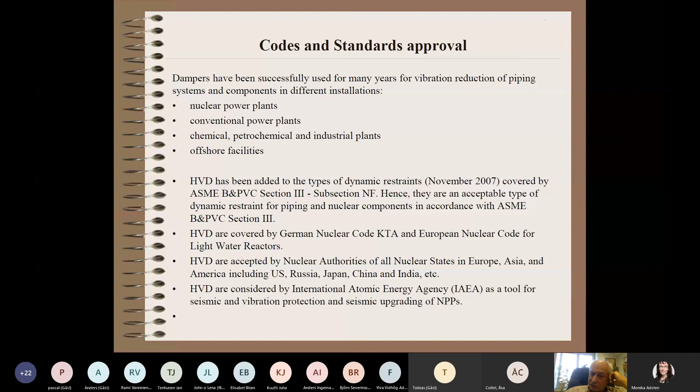For many years we have used this in nuclear power plants, conventional power plants, chemical, petrochemical and industrial plants, and offshore facilities. In November 2007, the viscodamper was added to the ASME code, and it also exists in KTA, the German nuclear code, and is recommended by IAEA for vibration mitigation and seismic resolve matters.

Regarding piping vibration criteria variety, it's a rather difficult question and problem compared with rotating machines. There is a lot of criteria, but the main ones are the Wachel norms and also VDI norms that we use in practice.

As you know, there is an ASME OMa recommendation with a threshold fatigue limit of 1/2 inch per second peak velocity. There are also some Russian standards, but I have to point out first that the criteria we developed for the Loviisa NPP on resolving vibration matters with upgrading its power was set at 7.5 RMS vibration velocity, and it's a really good limit to protect piping from fatigue.

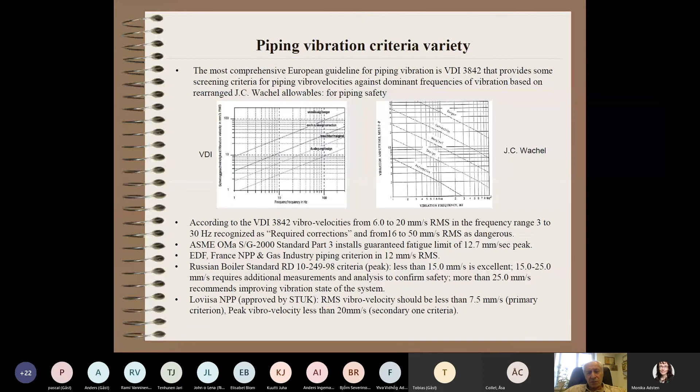Next slide please. Here are examples of damper supports. Some of them were presented in the previous presentation - thanks for the very good overview of different techniques.

Here are examples in the first row of damper applications in containment areas. The left picture shows the feed water line, and in the steam building also the feed water line and other lines, and the condenser part.

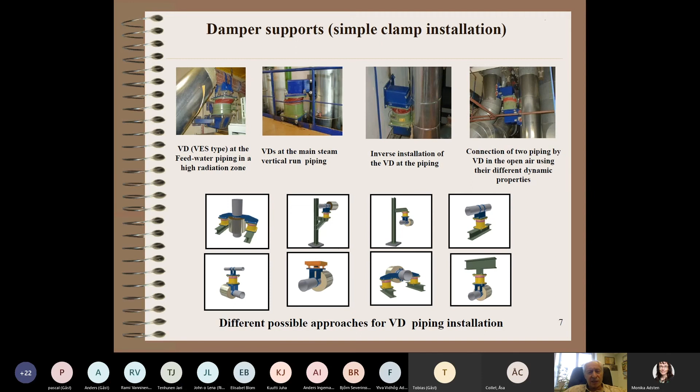Next slide, please. I will not pay too much attention.

Also, please note the left corner: early 80s tests from last century in the IHI shaking table with viscodampers, and finally the 2014 comprehensive test in the Japanese program for starting up nuclear power plants that were shut down. This special test was used also for seismic matters as well as operational vibration matters. So finally, as a result of this test, a mathematical analytical model of all types of dampers was developed, which presents a four-step Maxwell model.

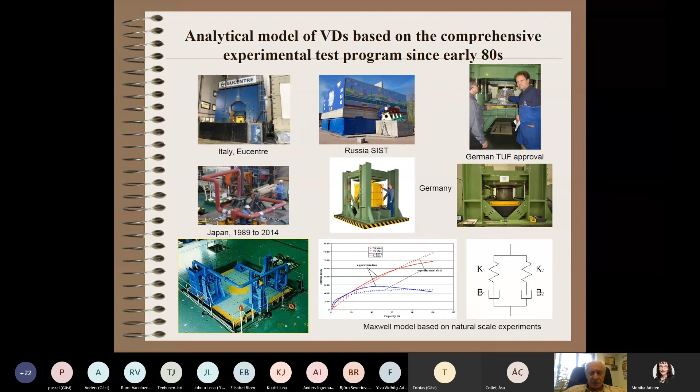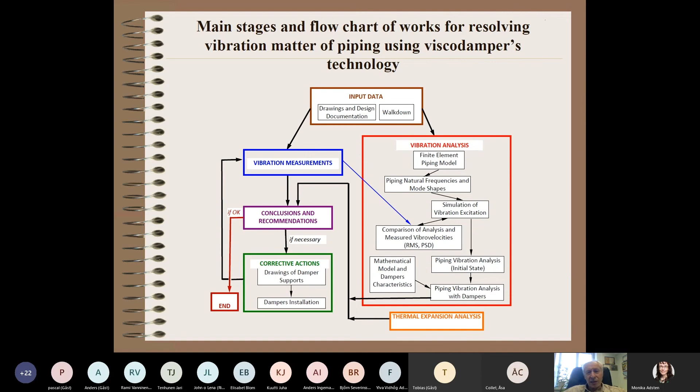Next slide, please. Here is the flow chart. So if you want to eliminate vibration, you have to follow this flow chart. Sometimes the use of viscodampers is not so successful as expected, but in the majority of cases this is because the flow chart was not followed. So it's very important - all blocks of the flow chart are very important to be successful in eliminating piping vibration. Next slide, please.

Here are some examples of application. There are numbers and numbers of examples in the report, but here are just a few, starting from 1988 at the most powerful steam turbine in Europe, 1200 megawatts, which suffered very high vibration on main steam lines with pressure of 24 MPa and temperature 565. This operational process suffered too much with this vibration and had no ability to maintain it. So it's the first example of installation of VD dampers, and we had a very extremely high effect on eliminating vibration.

One of the latest experiences is at Kola NPP, exactly the same as Loviisa PP. You can see the blue line is the vibration - blue column vibration was before dampers installation, and red after dampers installation. The result is obvious. Next slide, please.

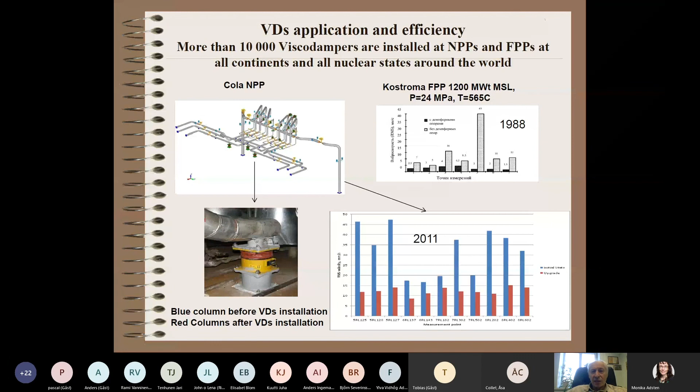For the VES dampers, bitumen-based medium, there is practically no influence from radiation. That means both types of dampers, VD and VES, can be installed in proximity of reactors. We have examples where, for almost 25 years, one set of dampers has been working in an extremely high radiation zone in RBMK reactors, Chernobyl-type reactors. Next slide, please.

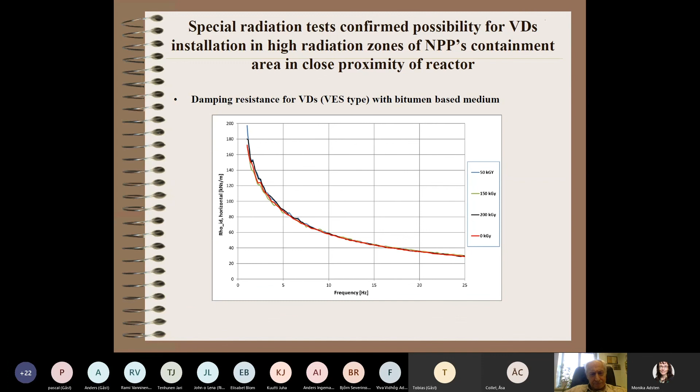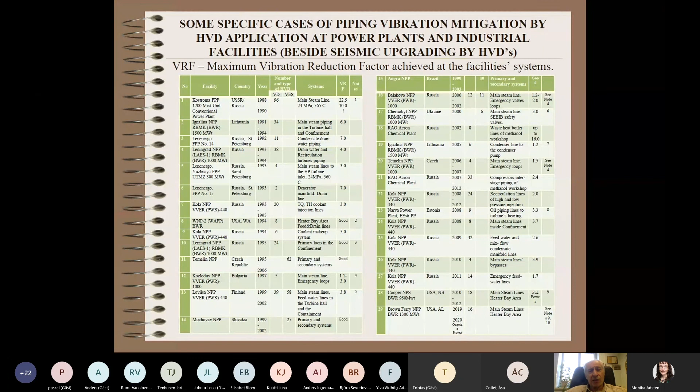Here are some specific cases of vibration mitigation. You can see a number of them in the report, with all description of these cases, and also explanation of why some cases are very successful and why some others are not so successful. All of them decrease vibration essentially, but if you follow the flow chart shown initially, you'll be completely on the way to success.

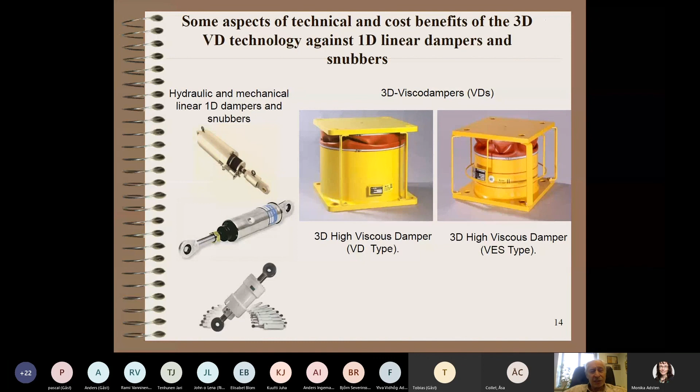Next slide, please. Here are some aspects of technical and cost benefits of 3D technology against 1D linear dampers. In the previous presentation there was some wording about that, but I want to emphasize this point. So if you compare two options, to use 1D linear damping or 3D viscodampers. Next slide, please.

Regarding required number and primary cost - in the left picture you can see the primary cost. For a 1200 megawatt nuclear power unit, if you need 750 snubber units, you need 3 times fewer dampers due to 3D operation. So even in primary cost, we have a factor of 3.

But it's not so important in comparison with the maintenance cost. According to our experience and according to the US NRC experience with the American snubber problem, you have dramatically lower maintenance cost in case of viscodampers, because snubbers are a rather complex mechanical system. That means after 3 to 5 years, you have to disassemble it, wash it, bring it to a clear area, test it, and then bring it back. It's a lot of cost, a lot of money. So that means high viscous dampers do not need that - you install it forever. In some cases you can change the liquid, probably after 20-25 years of operation. You can change the liquid during outages, nothing more.

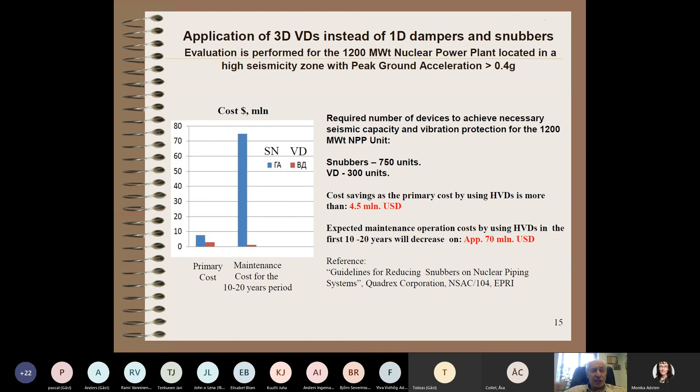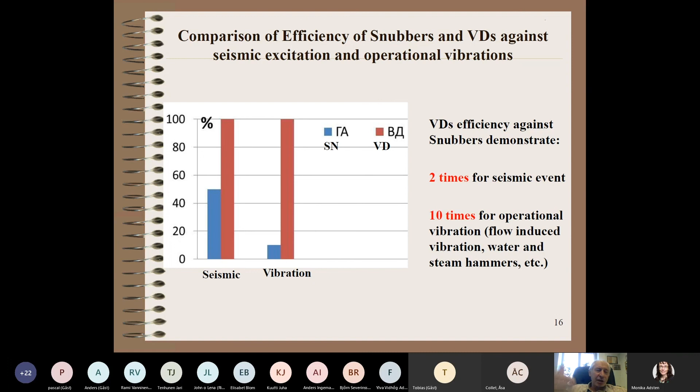Next slide, please. Regarding efficiency: for seismic, it's approximately twice better, and for vibration mitigation, it's 10 times better. Our examples and a number of cases confirm it. Next slide, please.

Here is a very practical example of a new line where a comparative study was done on whether to install snubbers or dampers on the system. Initially 8 Lisega snubbers were installed - this JNG NPP line is a PWR reactor - and then it was substituted by only 3 dampers. That's only primary cost, and as mentioned, much more expense is devoted to maintenance costs.

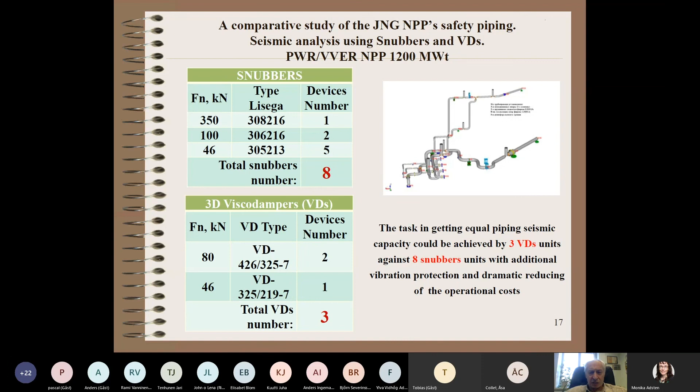Next slide, please. And final remarks. In general, on the basis of comprehensive analysis and experimental experience, it could be concluded that use of 3D viscodamper technology is the best option for piping vibration mitigation and seismic protection in comparison to all other existing approaches. At the moment, I don't know what will happen in the future - probably there will be better technology than what exists now. But nowadays, I have to confirm that it's so, as an engineer. So thank you so much for attention.

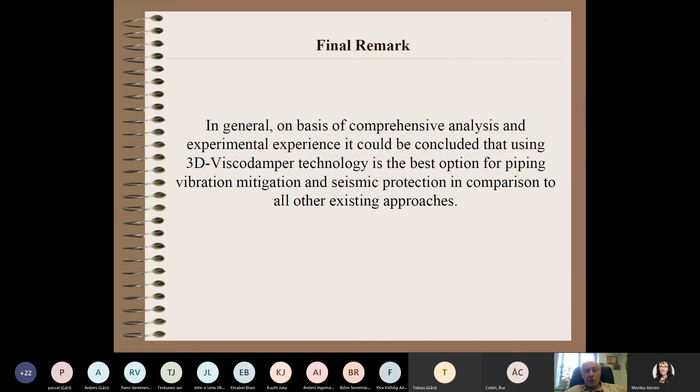I just - 21 minutes, I think, passed in my presentation. That's all for today. Thank you so much.